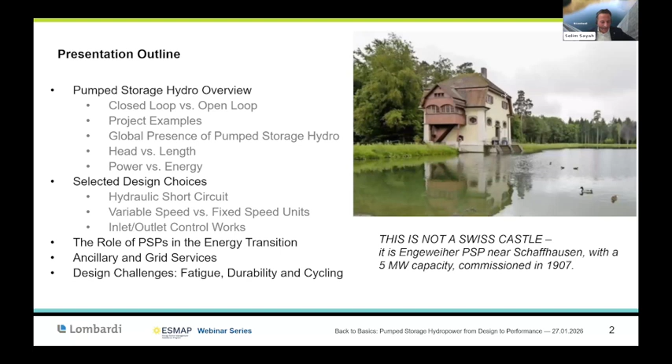The picture that you can see here on the slide is not a castle. It's one of the oldest pump storage schemes in the northern part of Switzerland, near the Schaffhausen Cascades. It was commissioned in 1907. It is 5 megawatts of capacity. You might think this capacity is a small one, but at that time, when we were using horses to transport, building a pump storage scheme was really a great achievement.

So, a difference between closed loop and open loop. Let us start with the most common, which we often see where we have big lakes: the open loop. Practically, open loop is hydraulically connecting two existing water bodies. At least one of the reservoirs should be part of a natural water system, meaning we have a river flow. It has lots of positive key characteristics. It doesn't require building two reservoirs, so lower capital cost. It can use existing dams as the upper reservoir, and sometimes it's associated with longer duration storage.

Another feature of the open loop is that it has less water head variation, which allows better flexibility for the pump storage scheme. The con of such an open loop concept is that it might have some environmental permitting challenges, because it will be using existing lakes or existing reservoirs.

Closed loops have commonly started to be designed maybe in the past 10 years, I would say. We are not seeing lots of closed loops, specifically when we have to build two new reservoirs from scratch. Those are definitely capex consuming. We have to be sure that they have enough energy duration, because while building two reservoirs, you need big volumes to generate a longer duration. The good thing in closed loop is that practically you can build it wherever you want, where you have the good topography.

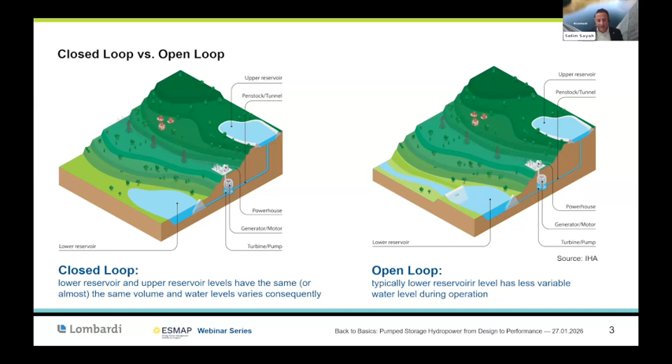A couple of examples of pump storage schemes that are not very typical. This one comes from Austria, Molln pump storage scheme, capacity of 300 megawatts. It's under design. They opted to build a powerhouse close to a new reservoir to be built downstream. And the powerhouse, as you can see here, is in a shaft. This kind of configuration really allows reducing the capex instead of building powerhouses below ground or in a big cavern. It has a very short waterway system, and the particularity is that they provided an underground upper reservoir built entirely in cavern in the Austrian Alps.

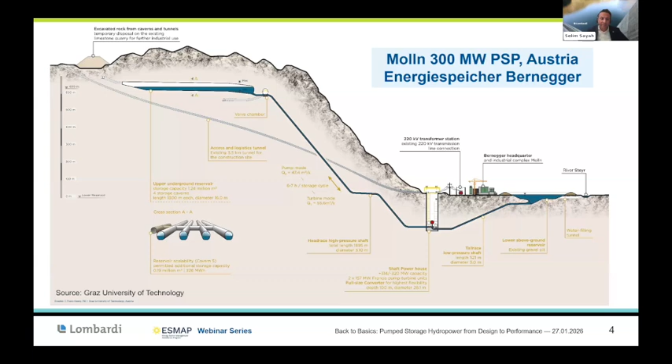Another impressive pump storage scheme recently commissioned in Switzerland is Nant de Drance. Nant de Drance started the design activity almost in 2006, and it was commissioned a couple of years ago. This is a very particular project because it became kind of a benchmark for recent state-of-the-art pump storage schemes around the world. I see lots of clients from Australia building Snowy also visited this project to get some ideas about how it was developed. It has a very nice configuration. They are using two existing artificial reservoirs in the Swiss Alps, and they heightened the upper reservoir dam just to have enough capacity.

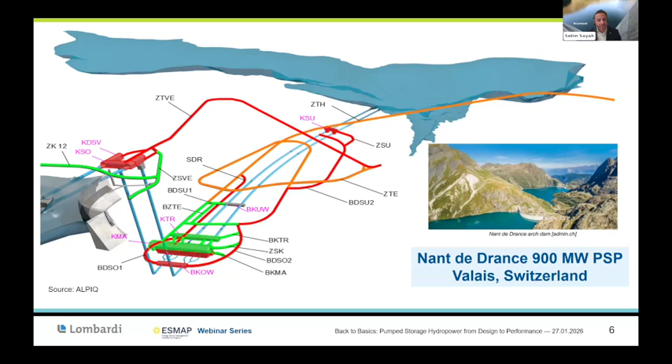Another impressive under construction project is Snowy 2.0 in Australia. So this project is actually under construction.

Hopefully it will be commissioned this decade. The design started in 2015, I would say. And there are some particular features of this project. Definitely it has very long tunnels. But one of the main features is what we call a load index. And this load index is practically the static pressure multiplied by the tunnel diameter.

In the present case, as you can see on the upper left graphic, the red histogram of Snowy shows that the load index is one of the highest in the world, practically higher than one of the biggest ones recently commissioned, around 20 years ago, Grand Dixence. So this load index practically defines the complexity of designing and building the waterway system. And it's a nice factor to understand how much the designer and the owner might suffer while designing and

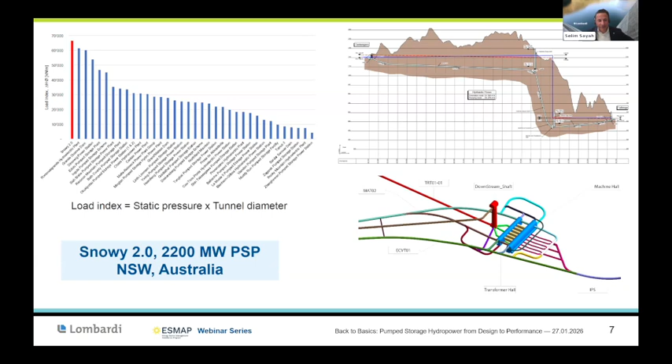building such major schemes. This is a global picture of where pump storage schemes are being built or where they exist. So this is a nice picture inspired by the U.S. Department of Energy. I would say we are at a bit more than 160 gigawatts of capacity around the world. Definitely, we are seeing a strong push to build more pump storage schemes. As designers, we all know that now the demand for generation schemes is maybe slightly less than the request for designing pump storage schemes, and there is a clear trend of the market

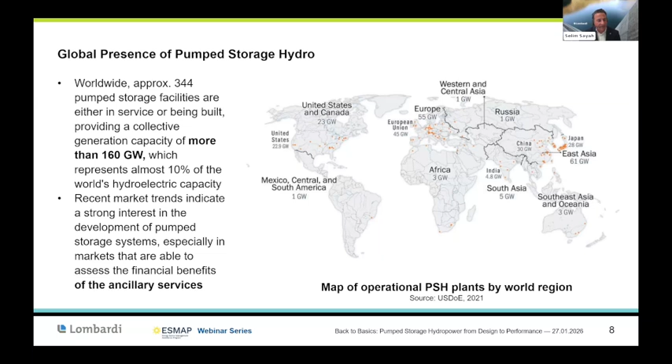regarding this technology. I would also like to introduce a layout feature, which is kind of a rule of thumb. It is what we call the head vs the length of the waterway. So practically, when you want to start designing a pump storage scheme from scratch, you divide the length of the horizontal waterways by the static head of the pump storage scheme. And if it's below 5, you might have a good feeling about it, and developers especially will think it's an affordable plan. Between 5 and 10, it's acceptable, and definitely above 15, it will require complex engineering and construction activities, and it will be expensive. The example here goes to Snowy, where we have this ratio around 30.

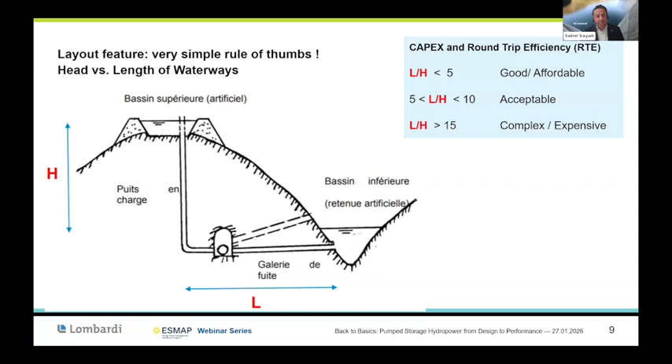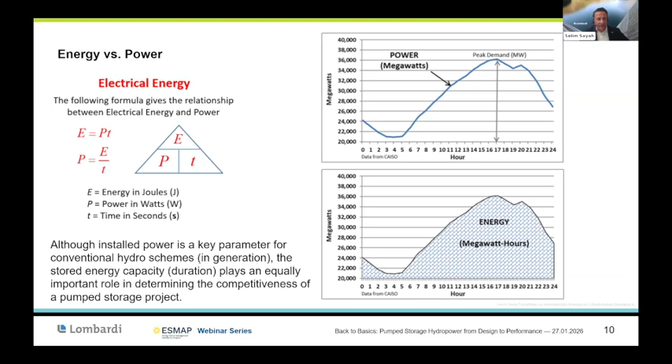Another feature that I would like to introduce, especially in comparison with generation plants, is energy vs power. So in this case, as you can see on the graphics, a generation system is practically defined by the installed power. But a pump storage scheme is defined by both the installed power and how long it can generate for energy transition. So this kind of feature is always good to think about. Now, typically, pump storage schemes are designed for at least 10 hours of generation, which defines the energy.

Another feature, which is a design choice, is what we call hydraulic short circuits. Hydraulic short circuits are a hydromechanical and layout feature that allows offering flexibility to the plant. I always like to propose this kind of feature when it's feasible and easily done. So in practice, if we are not able to provide such flexibility by reversible turbines or a ternary system, we can pump and generate using the different units to allow good regulation of energy output from 40 to 100%. In pumping, the steps are 100% of the installed unit. This hydraulic short circuit feature is something that, as designers, we would like to propose.

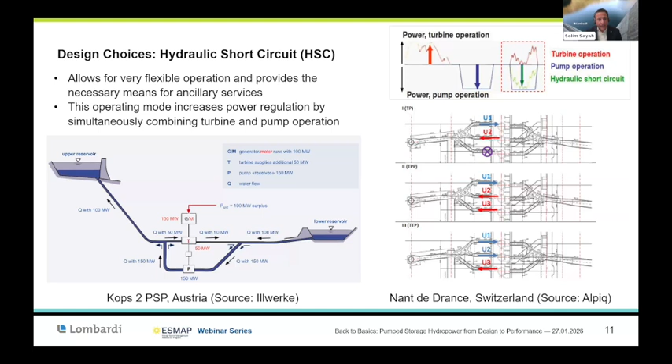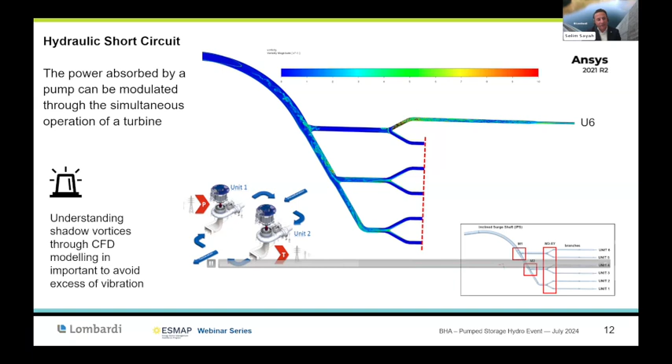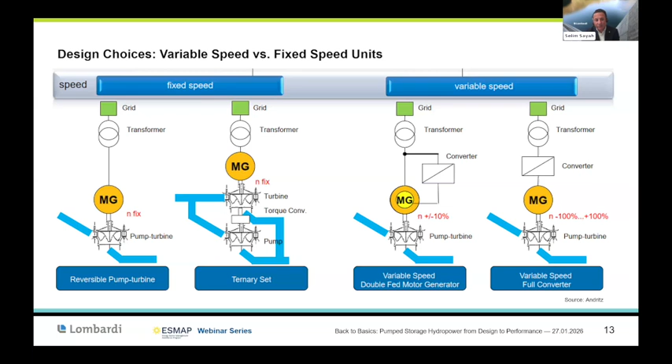Another design choice is variable speed vs fixed speed. This is a big question being asked recently, not only because of design choice, but because of capex investment. On the left hand side you have the fixed speed units, and on the right hand side the variable speed units. Variable speed units can be divided into two. The easy and less expensive one is a variation between -10 and 10% in rotational speed, while the fully flexible one, which requires big civil infrastructure, especially if it's underground, is the full converter variable speed. Those are really major schemes that need to be understood from the capex perspective, but they give very good flexibility and services to the grid.

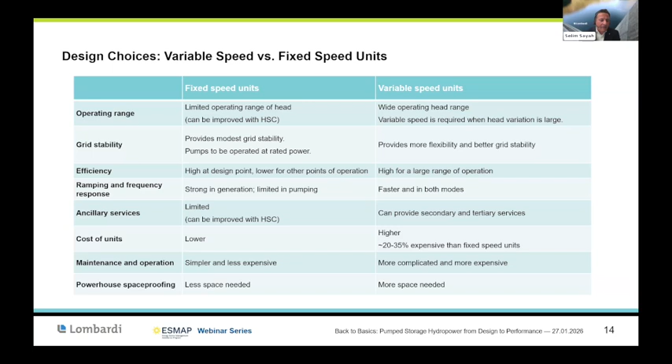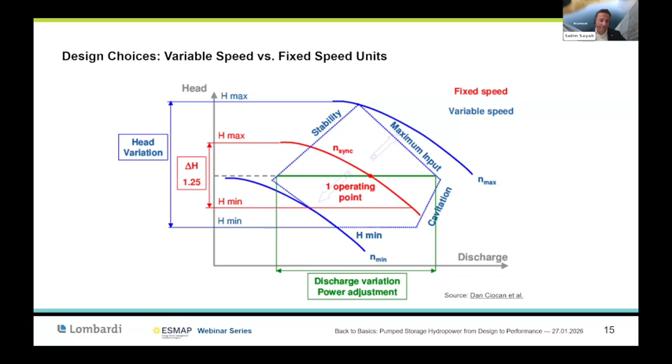Another hydraulic feature I'd like to share is the design of the inlet-outlet works. As a hydraulic designer, we used to design an intake structure for one single direction of flow. However, for pump storage, you have to think in both directions.

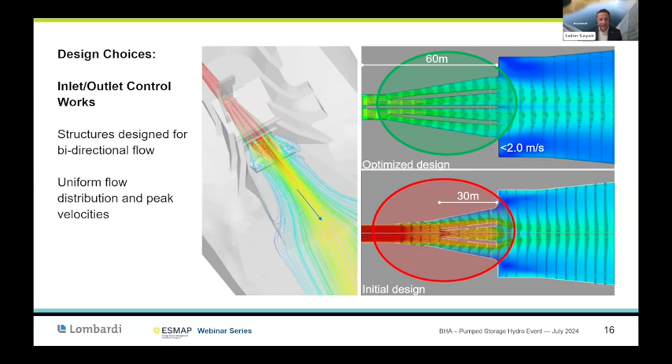Here is the example of Snowy. On the low red graphics, you can see the initial design of the intake, where practically during generation the intake had all the velocity field concentrated in the middle, and we had to practically double the length of the intake to answer the requirements of the intake structure in generation, where we have a way more uniform flow. So these are things we should look at when designing a pump storage scheme, especially the intake and all the environmental requirements regarding velocities.

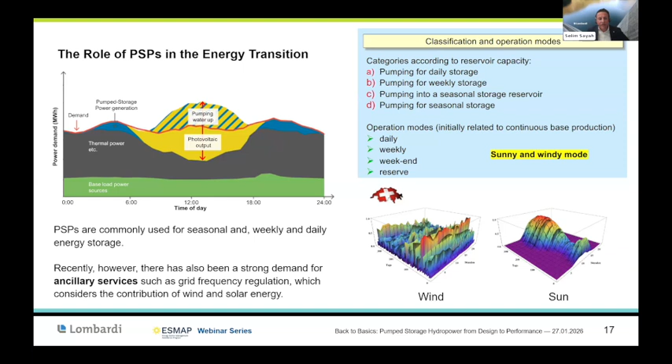Also on the lower right, you can see the sun variation and the wind variation. So practically, in addition to the seasonal, weekly and daily energy transfer, we are talking about using pump storage schemes also to answer intermittent loads coming from sustainable energies.

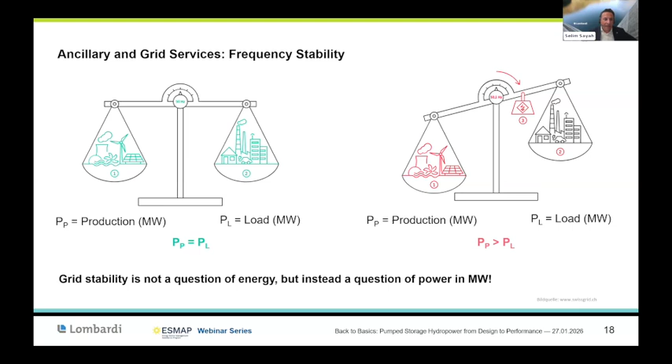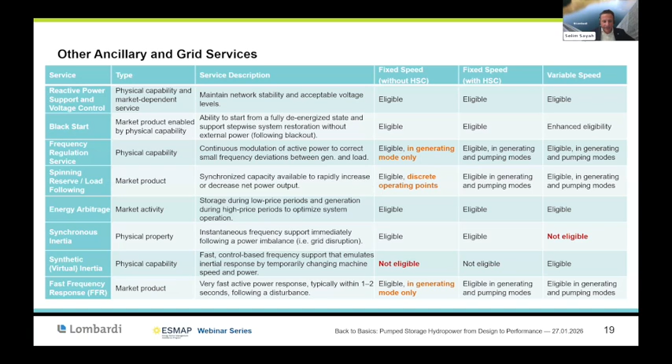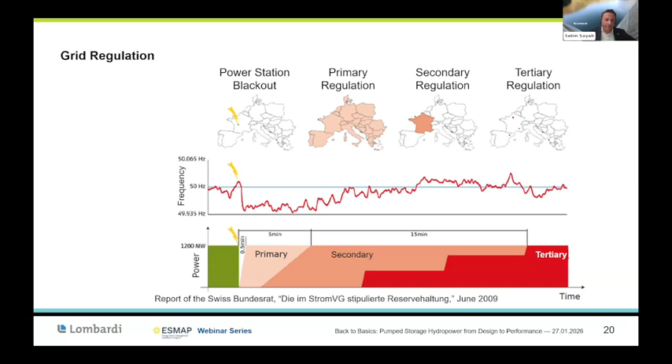This example is related to grid regulation and blackout in case of use of ancillary services for pump storage. Another design challenge is...

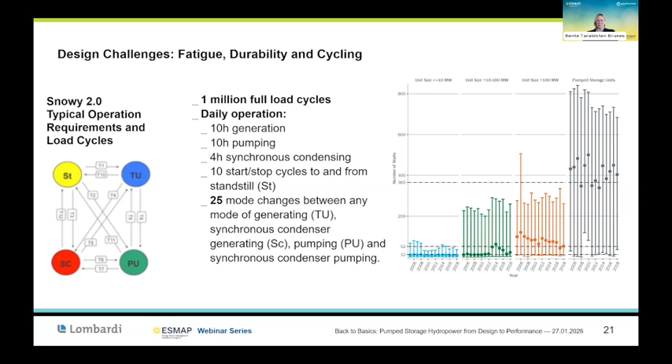So should I continue, Bente? Yes, if you can just wrap it up quickly, it would be great. Yeah, okay, maybe I would just share the design challenges related to fatigue.

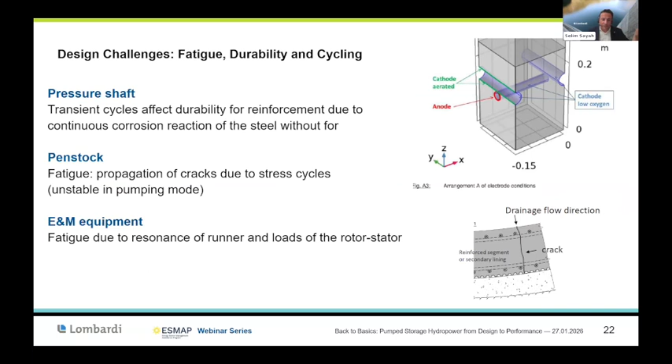Considering the cycles of pump storage, we need to understand the fatigue design for concrete lining and issues related to durability of the reinforcement, since we will have cycling all the time between pumping and generation. Also, the last slide is related to steel liner, which is part of the biggest capex in a pump storage scheme. We typically see a common way of designing steel liner based on fatigue, not only on external or internal pressure. So understanding the fatigue feature and durability of major elements of the pump storage scheme is very relevant at the beginning. Thank you all.

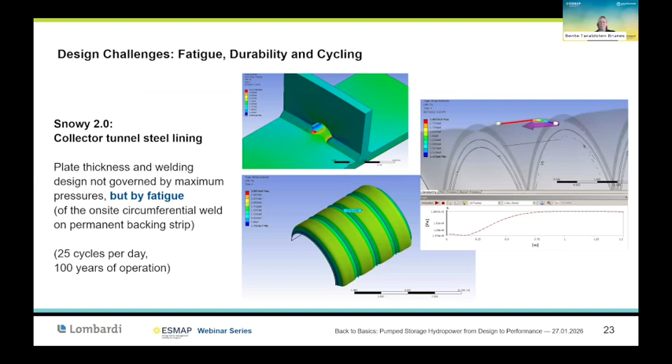Thank you so much, Selim. I think what this presentation demonstrates to me is that we have an opportunity to tailor the design of pump storage hydropower plants to really provide these services to the power system that we are seeking.

That said, it can also be quite challenging because we are aware that pump storage hydropower plants have an expected lifetime of more than 100 years. And if you had a crystal ball to look into the future for what kind of services pump storage would be able to provide in 100 years, and what the expectations of the power system are, it's a very interesting thought exercise. But I wanted to ask you, Selim, if you were to focus the design on key elements for meeting future requirements for the power system, what would be the main ones?

So I think you said it extremely right, Bente. We've been faced with one of the unknown aspects of how the grid will evolve during the next 20, 50, 100 years. Snowy Hydro 2.0 is being designed for 100 years of operation without major maintenance. And practically, after discussing with the government, it was decided that we need to provide a very flexible power plant because we don't know how solar or wind energy will come, or how the grid operator will compensate the services that a pump storage plant will be offering.